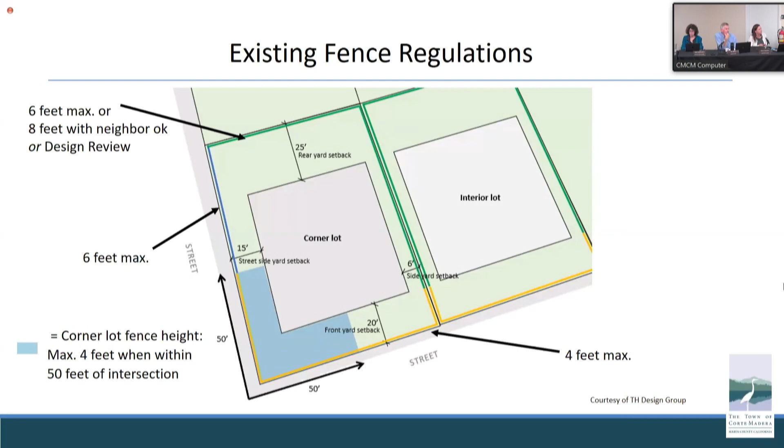I was just going to chime in. The rationale for that, as you may know, is to not restrict line of sight when people are at a corner trying to turn left or right. So you can see over a 4 foot fence, but you can't see over a 6 foot fence, generally speaking.

And that's what we're talking to you about tonight.

So retaining walls are actually not even defined in our zoning code. The code does define walls and calls them artificial structures, constructed of many different things, used to screen things, used to enclose things, and to retain a building or areas of land. So it kind of encompasses retaining walls in the wall definition, but not really. A general definition out there in the world is that retaining walls are relatively rigid structures used for supporting soil laterally, so it can be retained at different levels. That is the definition of a retaining wall.

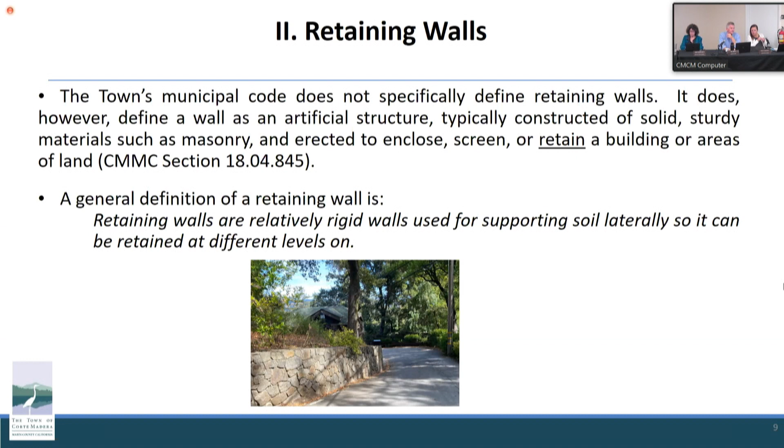And so, fences on top of retaining walls - we have lots of them in town. They're a very common thing to do, in front yards, all yards. So we really thought it was important to address them. With that said, they're not a huge problem. We don't spend a lot of code enforcement time dealing with fences and retaining walls, but we'd like to have clear guidance for applicants so they know what they can do, and neighbors can know what they could expect nearby. It becomes extra tricky when you have a fence on top of a retaining wall, because those combined elements could end up with quite a large structure. So our proposed additions to the code and clarifications will hopefully set clear parameters for everyone.

And we'll end up with people having the ability to level their yard, because that's really what they're doing with their retaining wall. They're trying to level their yard either for a play area or a place to sit, or maybe just for a better garden, or to reduce the slope of it. So they're trying to level their yard, and then they often want some type of fence to contain things in their yard or keep things out of their yard. That's the general reason people have fences and retaining walls.

So our first proposed new regulation is for the front property line, similar to this picture we just saw. Our new regulation would state you are allowed a maximum 3 foot tall retaining wall, and then you're required to have 2 feet of horizontal space for landscaping or some type of buffer, and then you're allowed a 4 foot fence on top of that. It's set back, so you're not getting a fence directly on top of a wall, but something with more of a buffer.

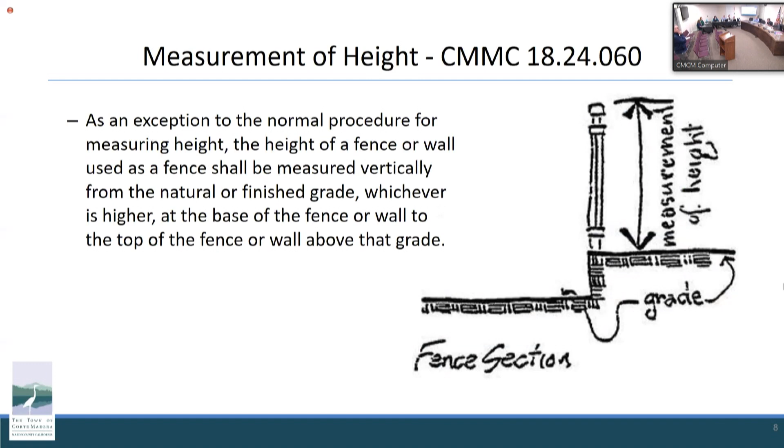I just wanted to comment that the built-up yard is limited in height to a 3-foot retaining wall. Sometimes you have to hold up a slope and there's a cut, right? But that's actually effectively lowering where somebody's standing on a slope. That cut is a different type of wall that we do allow, where you're not creating a built-up yard for standing, seating, viewing, or playing. That's the type of wall we're talking about here, versus people creating these built-up yards. All of a sudden what starts out as a slope comes up like this, and then they want to put a fence on top of it.

Here's another example. We're showing sidewalks that are flat, but a lot of our sidewalks are on slopes. It's only got to be like a 6-foot grade before you go across 75 feet and it's above 3 feet.

There's not a lot of latitude with that retaining wall and the fence, is there? You can't go above 3 feet, so you'd have to step it as you go down. You'd step the wall down as the grade goes down, so it mirrors the grade of the sidewalk.

But this is the exact condition I think you're talking about, Jim. You probably can't see it, it's kind of dark, but where the photographer is, that wall is 3 feet. At the end, where that opening is, that wall is 4 feet, maybe 4.5 — I'm just guessing, but it clearly increases because I've been there. So that's a retaining wall that ranges from 3 to 4 feet within that section. I think that's what you're pointing out, Jim.

Correct. I also wanted to ask — is this something where, when we talk about design review, are we talking about staff design review, or are we talking about coming to the commission for approval of something like this? Do you guys have staff discretion on stuff like this, if we're talking about between 3 and 4 feet?

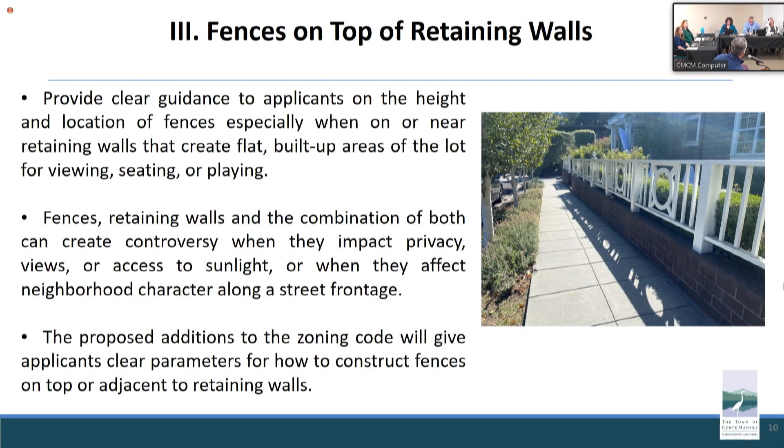Well, I think it'd be good to clarify whether or not we're talking about any changes to the retaining wall heights as part of this current proposal, because right now it's limited to 3 feet in height in any side or rear setback. I don't think that was proposed to be altered at all as part of this discussion.

No, I mean that can be a discussion. So if it was actually higher than 3 feet at any point on that picture, it would have been a non-compliant condition — that doesn't mean they didn't build it that way. It's not, in terms of what we tell applicants today, what they're allowed to do; it's max 3-foot high retaining walls in your setbacks, period. I say that because when we're talking about leveling yards, we're talking about a retaining wall that does not step, because it can't step if it's level.

If you've got slope where you're leveling a yard, your retaining wall is going to be bigger on one side. What we tell people is that the yard has to step down with the grade as well. The applicant would have to figure out how to level their yard or portions of their yard without exceeding the 3-foot wall height.

Actually, in that application, the photo I was showing earlier, they have a step in their wall in their rear yard. They have another wall because they had to limit it to 3 feet on that street side setback. So they have a little tiny terrace, even though it's a pretty flat lot on Birch Avenue.

Would it be a design review on something like that? Is it a staff design review or what? We don't have any right now. There's no opportunity. You can't apply for a design review to go above 3 feet in height on a retaining wall. That would have to be an application for variance, potentially, if there's unique conditions, but there's no design review currently allowed to exceed that height.

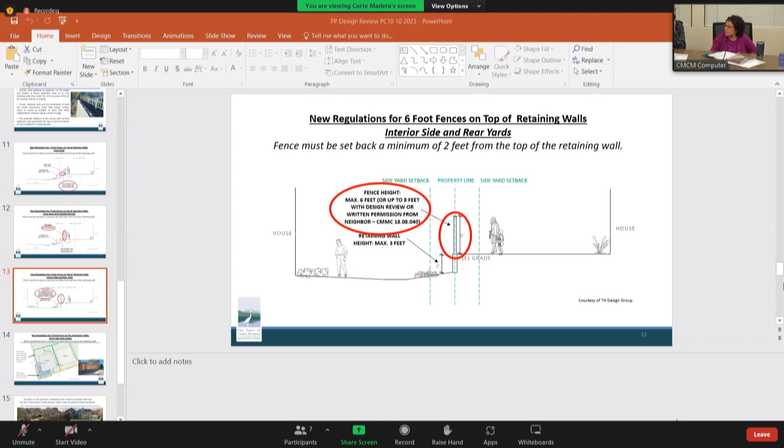This is an interior side or rear yard condition. And still, if the view of Mount Tam was over there, that fence would block it. Yes, it would, and their house could block it as well - the house to the far right.

Depending on how the house was set on the lot, and whether it's a single story or two-story house - most of the time, that's the compromise or challenge: the yard on the right wants a 6-foot high fence for their privacy, perhaps for dogs or kids. So at some point we have to address the priorities of view. What comes first, the fence or the view?

What's our highest priority? In this case, the persons to the right - their yard - they want a flat yard, so they put up a 3-foot retaining wall. Now they have a flat yard and they want a 6-foot fence. I agree that's a compromise or decision that needs to be made: what's more important, the yard privacy value of the person to the right, or the view, sunlight, and privacy of the person to the left?

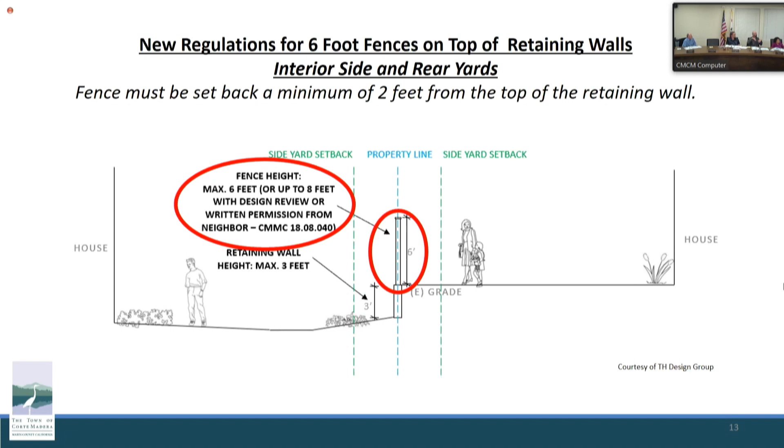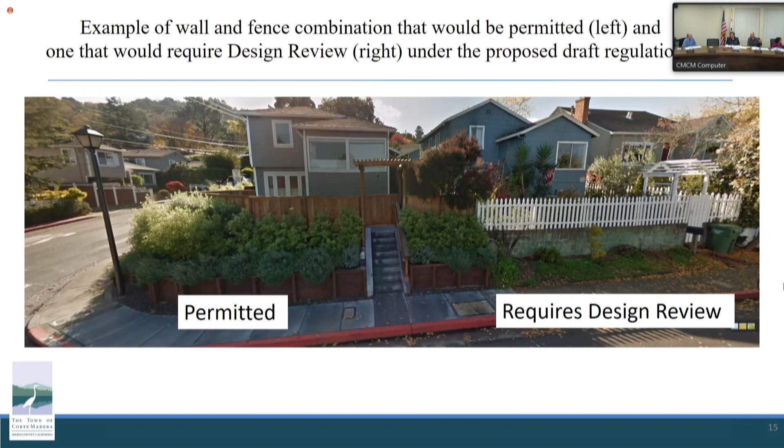I do want to go back to one thing I'd like to tweak. Could we have a combination, not a maximum of 9 feet as a parameter, so that if the retaining wall needs to tweak up, the overall height on the lower side never gets larger than 9 feet, but the retaining wall could adjust. Could there be some provision that by right you can have 6 and 3, but if the combination doesn't exceed 9 feet, that would be okay to be by right? The only reason I say that is because of the natural topography.

No, personally I would be in support of that. Yeah, you'd call it a 9-foot limitation, right? A clarification, are you saying the retaining wall could be higher than 3 feet? Yes, but the fence would have to be lower, so the combination of the two couldn't have an obstruction any larger than 9 feet.

Just for practicality of building, there's definitely things that come up in the field where it might be 42 inches here and 24 inches down here, and I don't get support for that. That's fine too. I was just curious if that was something that would be an opportunity to make the process easier.

I'd also like to have staff take a look at the visibility and the visual triangle, because I think it'd be easier to find it where the property line is at the corner than to be more consistent with where the corner is. I always get this mixed up with the front yard situation. So I think we're really trying to make sure we have visibility coming around the corner. And I think the biggest problem is really the setback of the house, not necessarily where the street corner is.

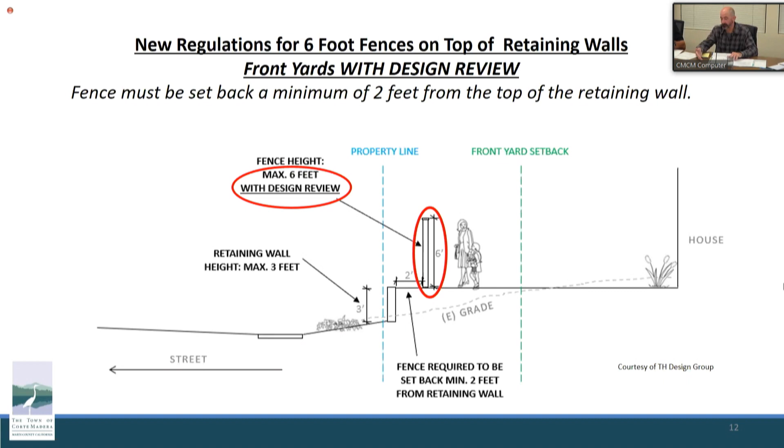Yeah, I was just saying that 'cause this is a pretty old code. Going 50 feet back, my sidewalk's 6 feet, and then I've got a 20-foot setback to my house. Now we're talking about going back on the side an additional 15 feet with a 4-foot fence, and I think that's kind of extreme.

So you want us to look at maybe reducing the 50 feet down to 35 or something else. Something like that, that kind of makes sense. That correlates with the setbacks is what I'm getting at, because we're on really small lots.

It's not a ton of lots that are over 5,000 square feet. I know our R1 code is 7,500, but there's not a vast majority of those larger lots. So I guess my direction would be to maybe look at decreasing that a little bit, a relaxation of that code.

And the end goal of that would be that you have the ability to create more privacy in the front or in the side yard, because otherwise, honestly, your visual angle is going to be cut off way before the 50 feet. So I just think it's limiting to a lot on the corner.

Wouldn't you have, on what's defined as the front yard, the 50 feet wouldn't matter because you can only build a 4-foot fence, right? So it would be the side street side that I'm concerned about, because you're basically making someone do a 4-foot fence halfway down their house.

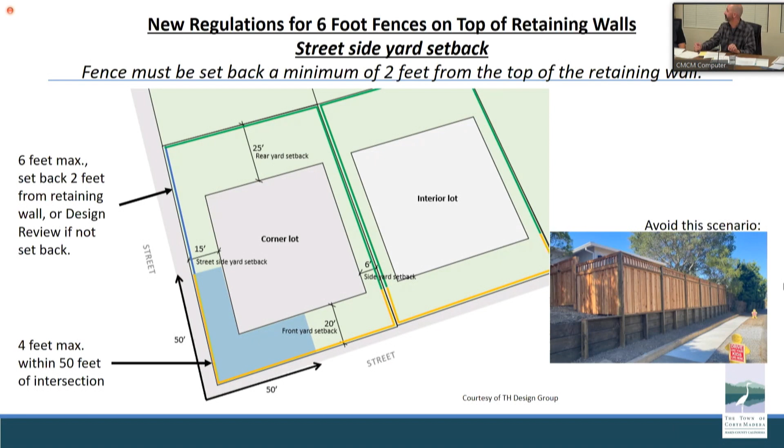I think it does step in absolutely the right direction. Your draft regulations on page 6, with the type in blue describing all of this stuff, is absolutely appropriate. I would support those.

I do not have any disagreement with anything other than what Jim brought up, which was the 50 feet along the side yard. I would agree with him, maybe a 35-foot point on the side yard would be appropriate for that.

To Daniel's comment about frontage, address, and front yard definition, you guys have some stuff in the code right now about that. Is there not something in there? And does the address not define it - if it says 550 Tamalpais, then that front yard is on Tamalpais? Is that fair to say?

No. For planning purposes, the definition of the front property line is the shortest one. Got it. And there's nothing wrong with putting your door on the other street and your mailbox on the other street.

As long as - the main point of addressing is mainly for public safety, so you can come and get to your house as quickly as possible. That's why they logically try to make addresses that way. Got it. Okay.